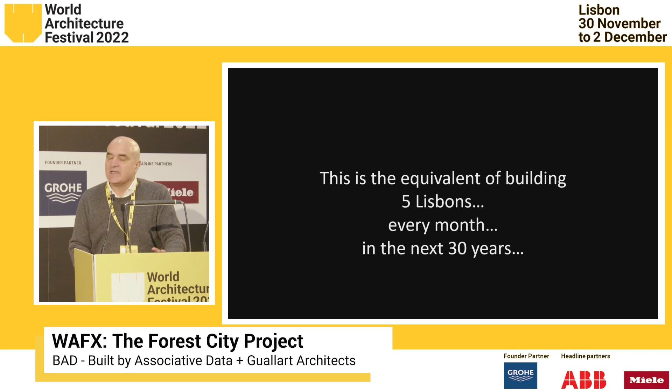We are starting to work in Africa, and according to UN Habitat, more than 1 billion new people will be urbanized in Africa by 2050. This means building 5 Lisbons every month for the next 30 years, a process of urbanization even bigger than what happened in China in recent years.

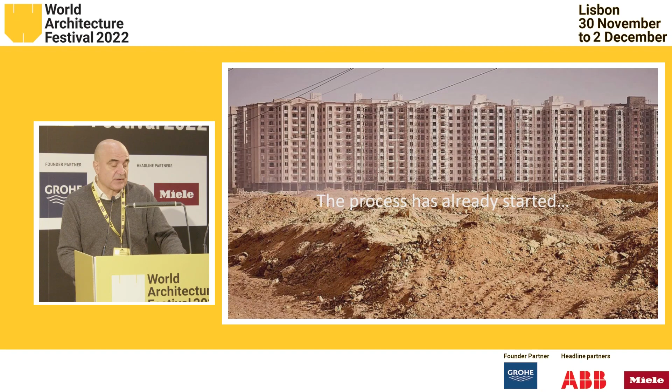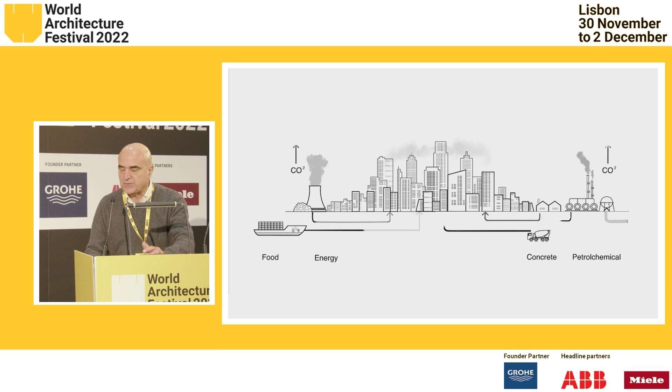This process has already started in cities like New Cairo. What we see is that we are still applying the principles of the industrial city built in the 20th century, where cities emit CO2, bring food with containers, produce energy somewhere else, and use concrete for buildings.

But the magical thing about the lower part of Africa, the rainforest, is that these are countries that are almost entirely forest. Gabon is 95% forest, and we were requested to develop a plan for a new development near Libreville, the capital.

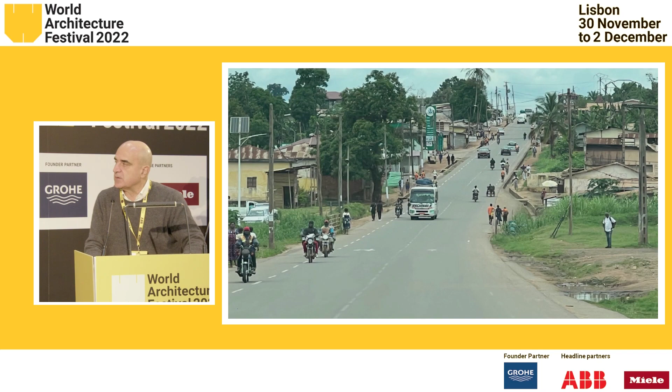What's happening in many African cities is that they are developed using the linear city model, following roads, without a real planning process of urbanization. Another dramatic thing is that although they have a huge amount of timber resources, they are using concrete - that's the thing we want to get away from.

It seems that the place that will have the biggest urbanization in the 21st century is still applying the principles of our 20th century, which we understand is somehow contributing to global warming.

So the solution, and this is where we are working also in the European context and in many other places, is to develop cities based on nature-based solutions, coming back to the origin, going back to the forest.

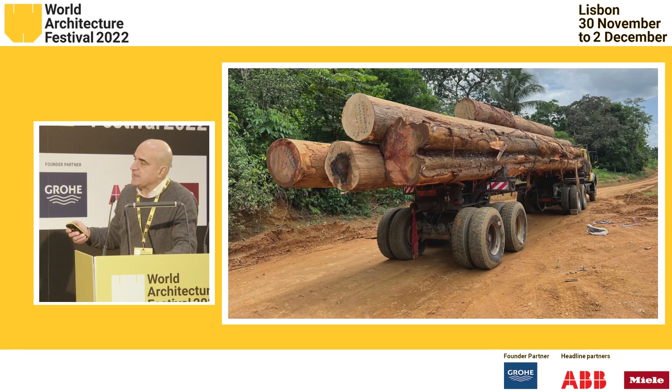The truth is they are doing incredible work protecting their forests and doing sustainable management, getting concessions to harvest trees. They take only 1 or 2 trees per hectare, and won't return to that area for 25 years. So there's a growing timber industry, though for the moment they only do very basic things - cutting trees and producing timber.

The bad news is that this timber is not used for African cities - it's exported to China and to Europe. Our idea, which we're discussing with the government, is how we can apply their own rich resources to produce a new role model to build new African cities and inspire the world.

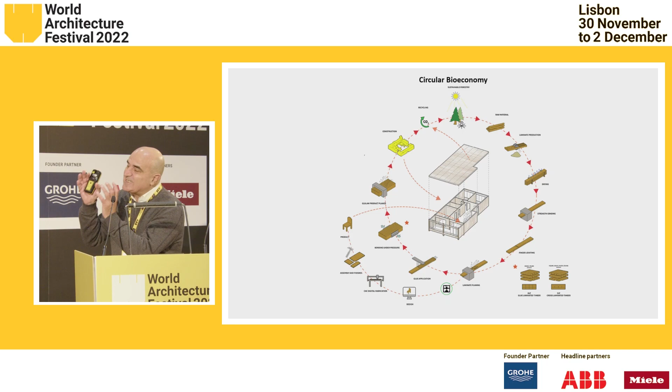This led to the idea of the circular bioeconomy - the idea that as architects, we should not only focus on the design of the form and the building, but understand and promote the full cycle: extraction of material from nature, its industrial transformation, parametric design using new technologies, and then building a new generation of buildings.

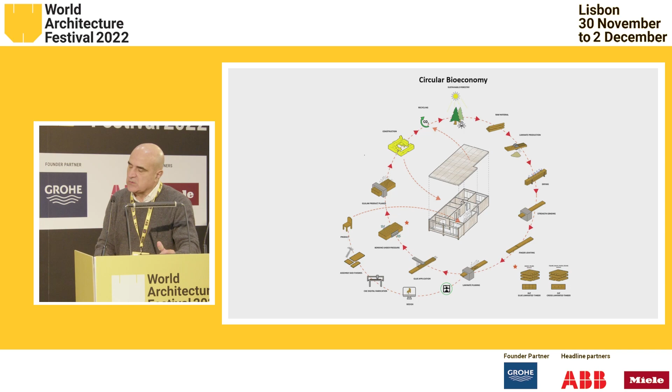But what about cities? We imagine we could create a new generation of cities that, instead of emitting CO2, absorb it. Cities that produce food locally, that produce their own energy - cities that follow the rules of nature, what we call biocities or forest cities.

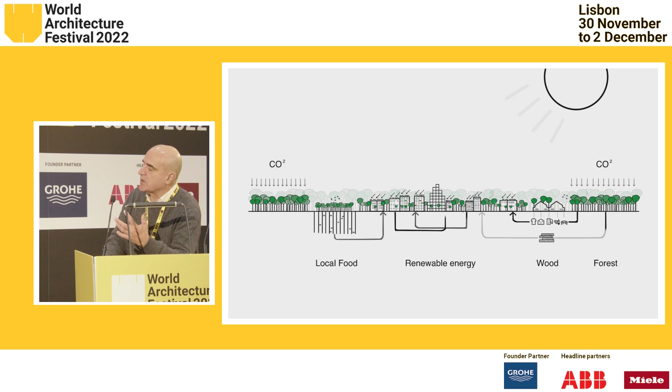Another important thing is the basic structure of the city. As you may know, I was chief architect of Barcelona for 4 years. In Barcelona, the word 'urbanization' was coined, and urbanization was a process where we implanted a grid on top of nature.

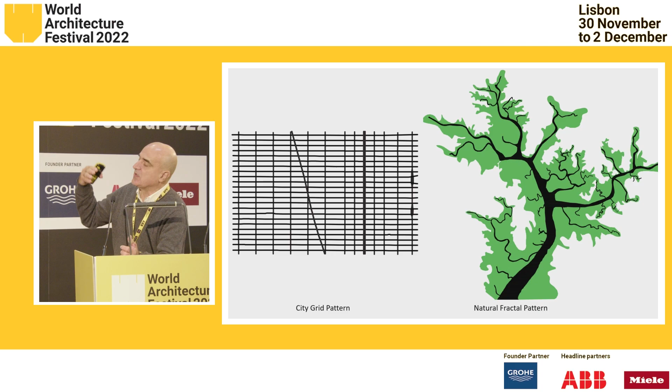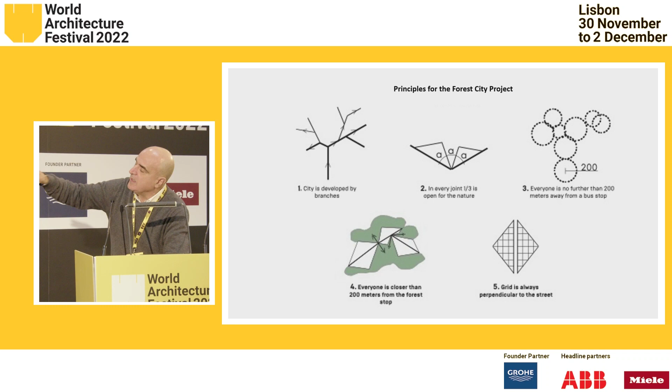But if you look at nature, it has its own kind of geometries - fractal geometries, where there is no center, where there is self-similarity in form. That's why we were analyzing how to apply the principles of linear cities, an idea developed in the 19th century by Arturo Soria in Madrid, to develop a new form of cities using the African principle of the linear city, creating different neighborhoods while letting nature connect the different parts.

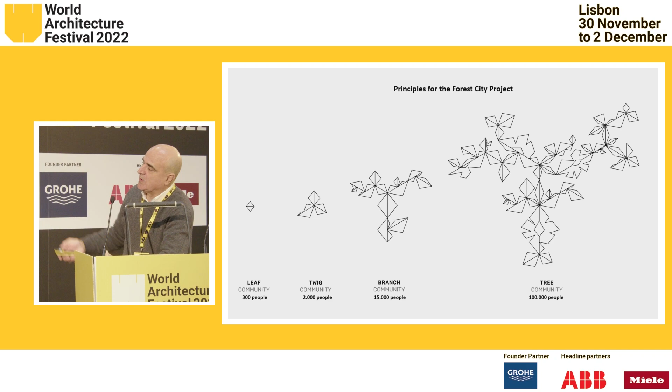And also a way to build cities that could grow in a fractal way, where there will be no clear limit, but there will be a clear rule of how to grow the cities. So the solution is this simple diagram that is the base for our project.

The idea of creating a linear city that connects different neighborhoods. Today we are talking about these 15-minute cities.

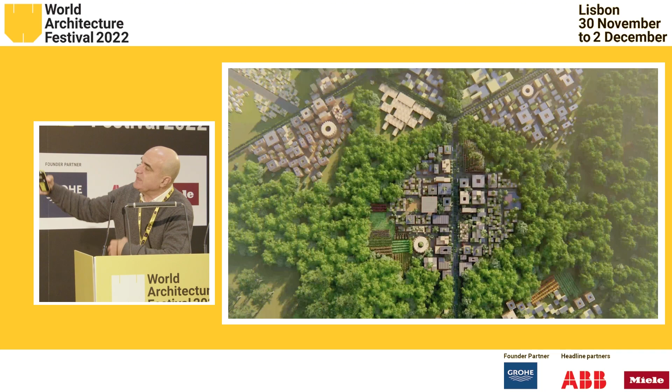So that means the idea that we have mostly a linear city with public transportation, and then the rest is mostly pedestrian. In our idea, we create neighborhoods that are mixed use, with different grains, interacting between each other, but also interacting with nature.

And then what we do is we make cities that don't grow against nature, but cities that grow with nature. We are talking about a place where basically the whole country, the whole continent is nature, and it's still a kind of virgin nature that is at risk of falling into the same problems we have created in the rest of the world.

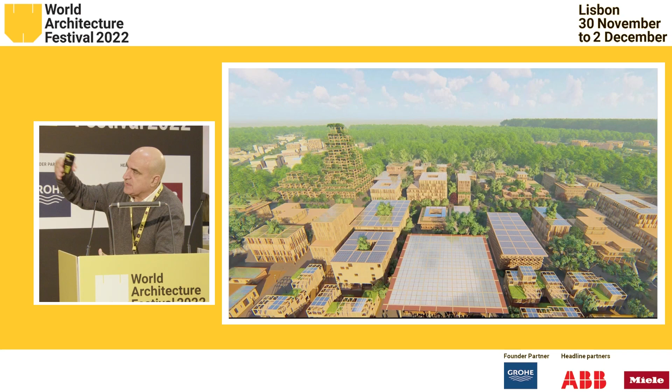So the way we propose to build these neighborhoods is using timber as material, but timber that is harvested from the region, and timber that is manipulated and transformed there.

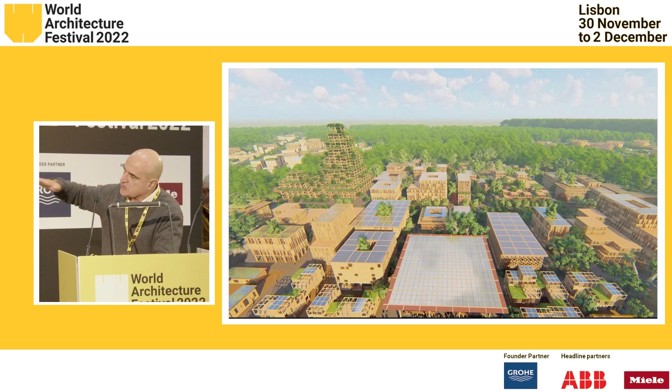A city that is building itself, a city producing its own energy using solar panels, in this case, because we are near the equator, will be almost flat. A city that is also organized with mixed use, a place where the city can work and can live.

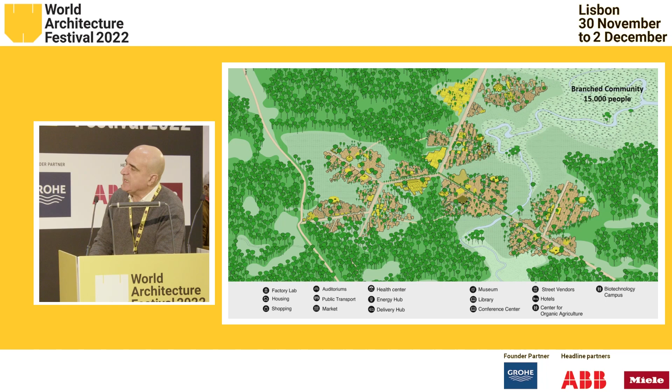And then the idea that in African cities, they are using new technologies, also for mobility, and new technologies like the distributed model to produce local energy, and promoting low mobility, is a great role model in order not to destroy the whole continent, creating great infrastructures, in order to imagine, as we are doing in Europe, trying to save our cities by reintroducing nature.

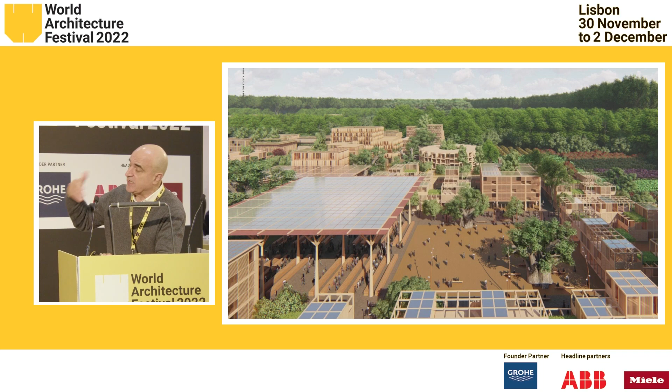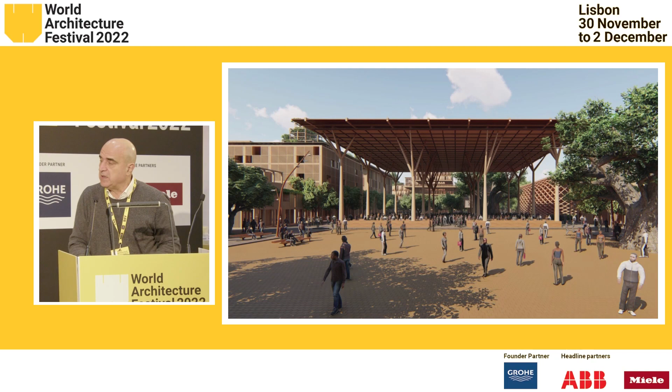The nature is already there. And then in this neighborhood, as you see, we introduce the markets as a central place, a market that defines also the core of many cities around the world. And this is the place that in Africa right now is the meeting place.

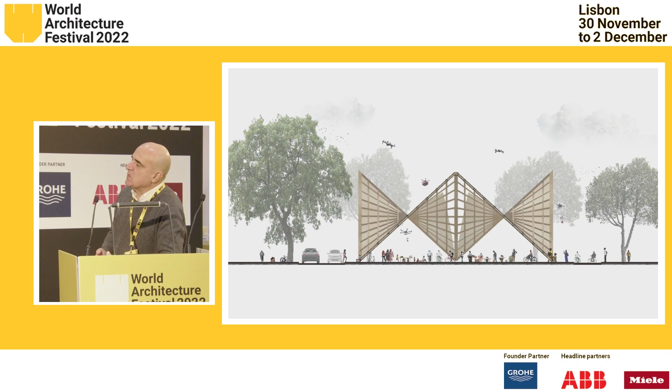A market that is represented with this big pergola, a place where also, as I say, we use drones in order to develop some special deliveries, especially in a territory that is very wide.

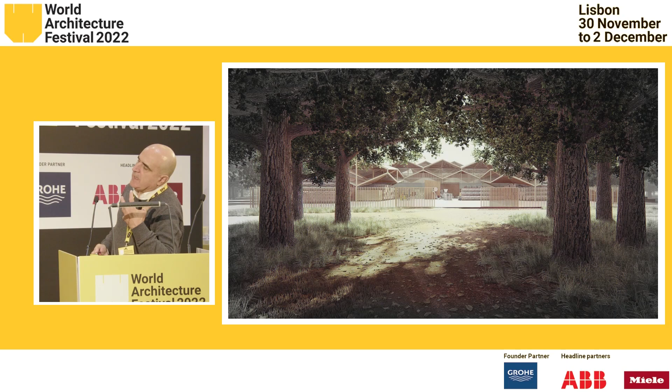A city that is also, as you see, connected with the forest, where the material that is coming from the forest will be manipulated in a biofactory, where we produce some of the material that will be used for the city.

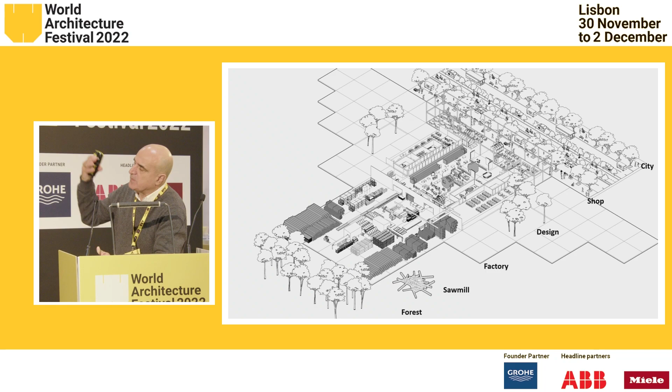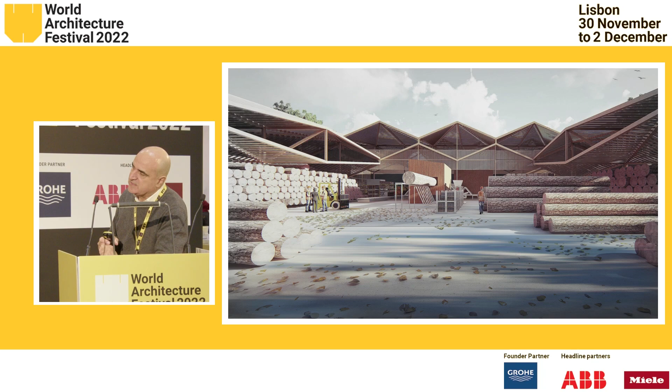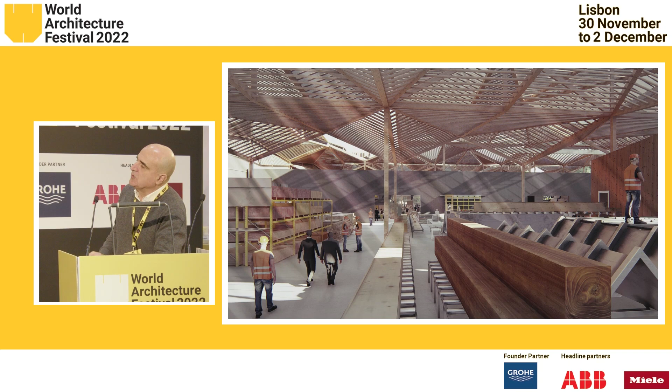So the idea is that in the same way that some of the social housing neighborhoods built in the 60s had their own concrete factory to produce the panels for the buildings, we'll have our timber factory within the city in order to produce the material for the city itself.

And obviously buildings that generate their own energy in a walkable city, etc.

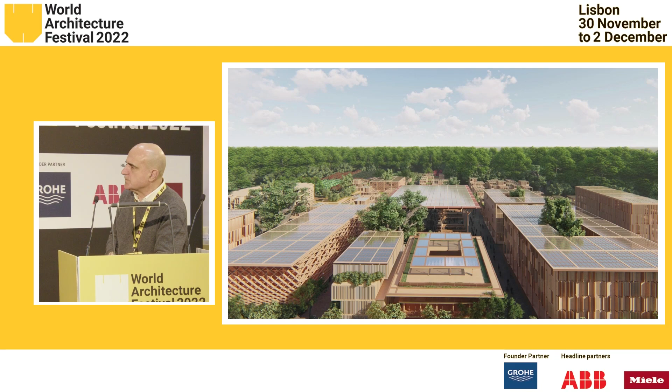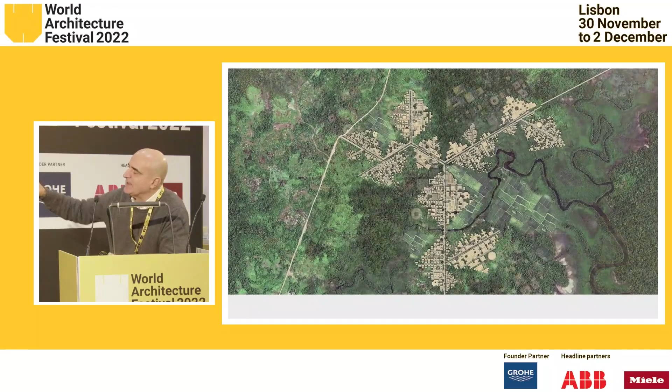So here, just to end, we have a small video that explains how this model of the branch city can be adapted to the territory in order to create this kind of density, but this continuous neighborhood that is connected through these transportation networks, and creates this kind of human scale, a new generation of the city following the rules of nature.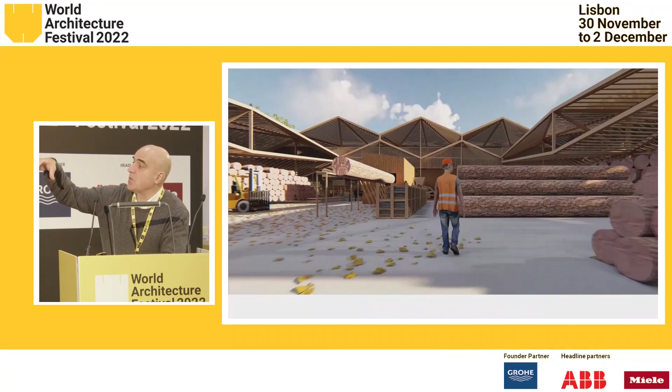This is the biofactory that will be one of the corners of the city where they will be manipulating materials.

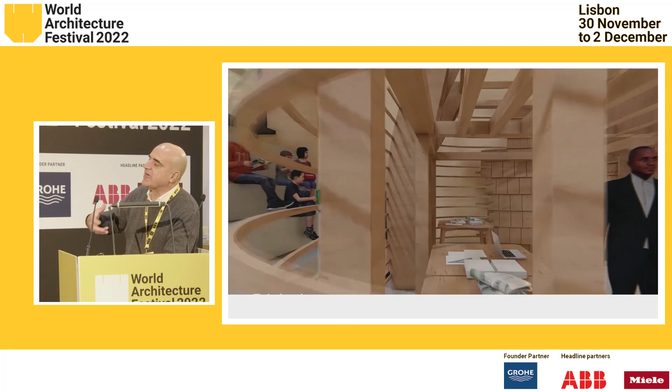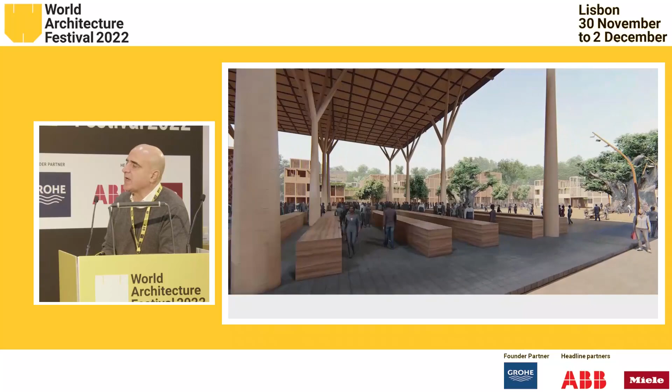So I would say that in this way you can empower the local economy, because they are building with the support of experts from wherever is needed. But the idea is that they build the city themselves using local resources, and with that knowledge they can also inspire other places in the world where we are trying to do similar transformations.

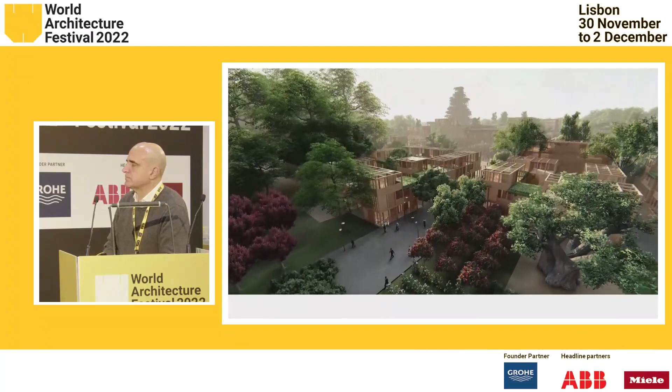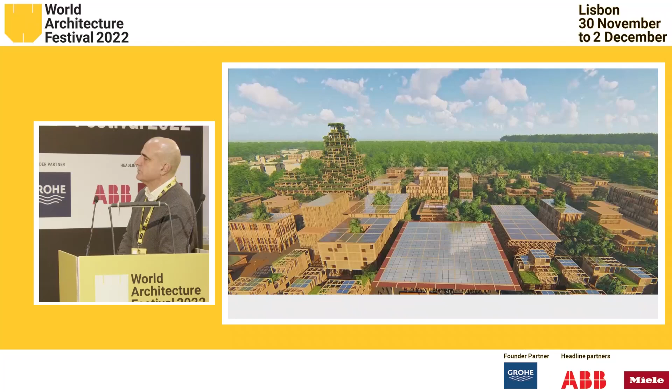We want to make this new way of making cities possible. Thank you.